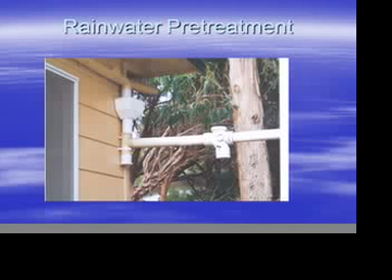Simpler version of this, again, this is just a simple leaf separator. This is a manual valve that basically the first 20 minutes, you'll let the water just rain, and then when you think about it, you go out there and you divert it, and then you start filling your tank. This is probably the simplest application.

Increasing, this is something called Gutter Glove. Gutter Glove, it's a very nice system, basically extruded aluminum, has a stainless steel screen that basically does a very nice job of keeping pine needles and things like that out of your water supply. It filters to about 20 micron. Does a very nice job of pre-filtering and keeping stuff out of your tank.

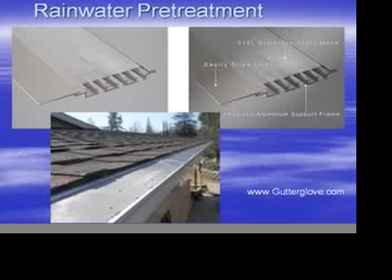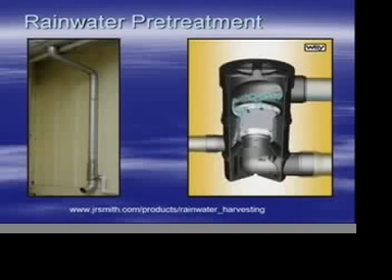This is kind of a close-up of the water catchment thing. This being the screen, they have different grades according to whether you're coming out of a lake or a pond environment for, say, a greenhouse, and we have pictures of that later to show, or whether it's coming out of your storage tank for use in your home.

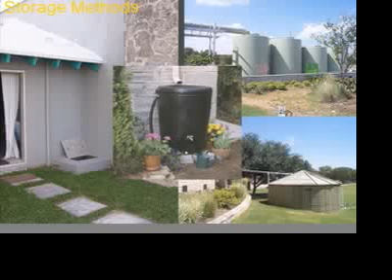Different types of tanks. We have concrete in the Virgin Islands where you're built on the side of a hill. You'll find that the tanks there are concrete, whatever sort of the sub-foundation that's used to kind of adjust the home to the grade. Underneath is typically the cistern of the tank.

Plastic, the key thing there is it needs to be opaque to keep the sun from getting into the water, helping to grow algae. Also, too, plastic, you want to make sure you have virgin plastic tanks. You don't want to work with recycled plastic because you really don't know what that prior plastic was used for. If it was insecticide or a paint thinner or something like that, you really don't want that as far as your water supply goes. They come in all shapes and sizes.

We have wood here. We have metal tanks. The ARCSA people had a convention in Hawaii where the entire compound, there was a hotel resort complex, was driven by rainwater catchment and had a lot of tanks just like that.

These are actually wood tanks, just like anything, like a boat. As long as they're wet, the wood expands and they do a good job of sealing. You just need to keep them wet to make them work right. The ones you see right now are probably going to be older because they're very expensive to use right now.

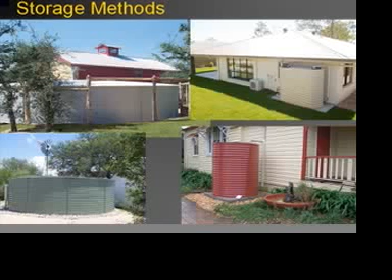Some people worry about water quality. I think you can see this guy with the trees growing in his gutters and worms and things like that probably isn't worried too much about water quality. These people are. In Australia they have done a lot of study about what goes on inside water tanks. As I mentioned earlier, the rainwater itself is pretty benign. It's when you start storing it that all of a sudden the problems will initiate.

Rainwater tanks harbor a wide variety of microbial species. That much is pretty clear. Species composition may vary considerably between tanks at different locations. And that's pretty self-evident too. Species composition varies temporally at any given site, depending on which way the wind's blowing, which direction your source of contamination is coming from. You have minimal evidence of fecal contamination.

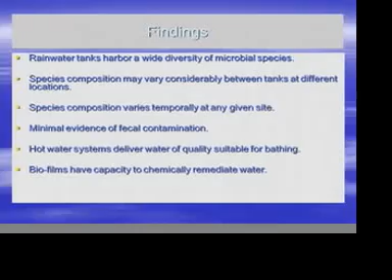Hot water systems deliver water at quality suitable for bathing. If you run it through and get it up to 130 degrees, that's going to take care of any kind of microbial action and Legionella and things of that nature. And biofilms have the capability to chemically remediate water, and that came as the biggest surprise to me, is that scum that builds up inside your tank is actually a good thing.

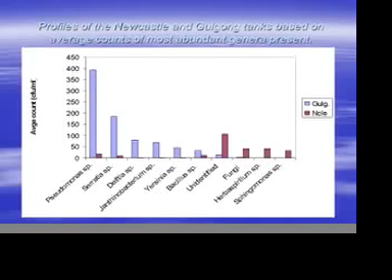This is a sample taken from two different sources, one Newcastle in Australia and the other called Gulgong. One being an agriculture area, one being a city area. So you can see the different type of bacteria growing at different locations. Interesting thing, I think the people that live in this community are probably used to those bacteria, and it's not bothered.

There's an interesting little bit of history. I used to work at Indiana University Bloomington about 20, 25 years ago. They got a case of Legionella among some people that came to the town of Bloomington. And that went on for about 2 years. But the interesting thing was there was no one in the Bloomington area that came down with it. They were all visitors, which speaks to, back in biblical times, in Proverbs 5 verse 15, it says, "Thou shalt drink out of your own cistern."

So maybe even back then they had health inspectors that knew that people would get accustomed to certain things, and it's okay. And that's the same sort of logic that when you and I go out of the country and drink the water, we come down with it because we're just not used to that kind of bacteria. And this is a typical situation pretty much throughout the world. We've seen situations in Hawaii where they have high-end homes where they are basically used to drinking the water that's there without any problems. This depends on, again, which way the wind's blowing.

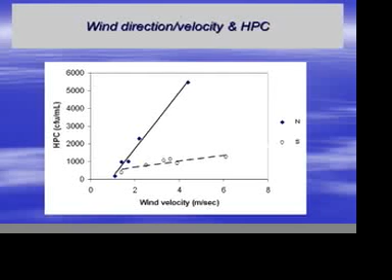HPC is sort of a conglomeration of bacteria, just sort of a roundhouse average of a lot of different bacteria that accumulate. And again, which way the wind blows, if they're going to be spraying the crops next door, you'll probably want to divert the rain that day rather than putting it in your tank. Again, the bioremediation, you get your film built up. You get the chemical remediation, and the competitive exclusion of pathogens. Typically, there's no pathogens in rainwater, and non-pathogenic stuff tends to be, as we mentioned, stuff that's kind of germane to the area that it's located in.

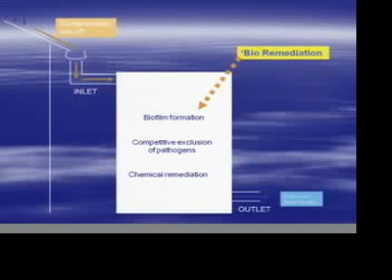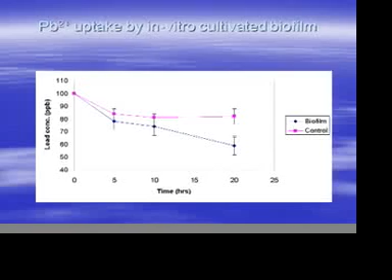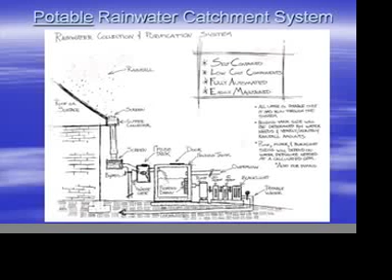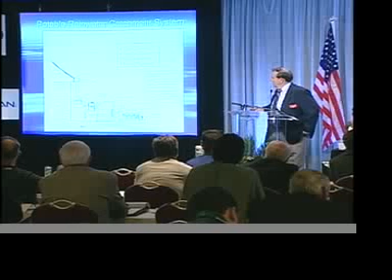So just to kind of summarize where we're at, everything we've talked about right now will probably get you by for a non-potable agriculture situation. We talked about the filtering screen out there, the preliminary filter that basically will take the sediment, the leaves, the debris, the fecal material off the roof, and it goes into our tank. This area right here is what we're going to talk about next. If you want to go potable water for your house, what do you do?